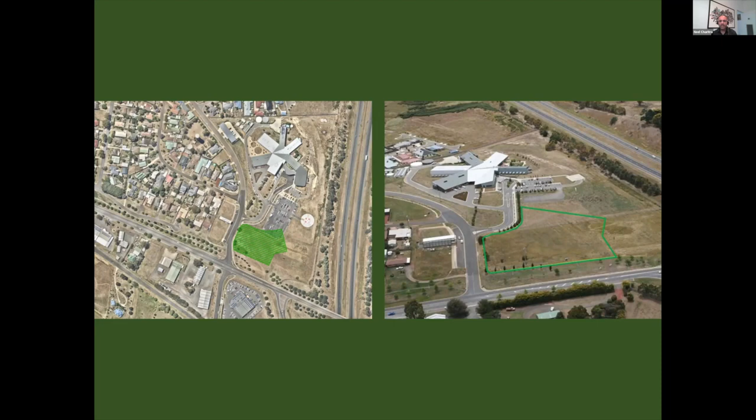The new 1,650 square metre building is designed as the flagship facility for the well-loved and growing health service, and replaces their 30-year-old outdated facility in the centre of town.

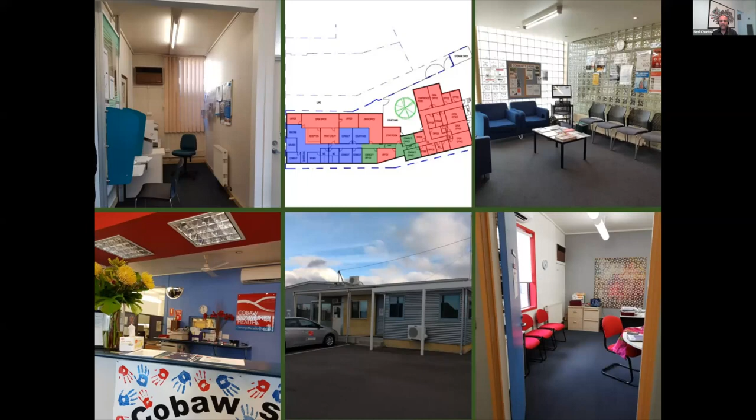They provide important community services such as NDIS, youth mental health, housing support, needle exchange, LGBTIQA support services, podiatry, family counselling, and family violence services, to name a few.

The brief was quite simple: create a non-institutional building that has strong ties to place, creates a new identity, is connected to landscape, has high amenity staff spaces, is calming, has intuitive wayfinding, and is universally accessible.

The brief fed nicely into our interest of embedding the core principles of salutogenic design, or design for wellness, into our projects. These principles are evidence-based and patient-focused, providing spaces that can alleviate stress and anxiety, creating an environment of wellness via clear wayfinding, connections to landscape, daylight-filled spaces, and spaces that are generous and have good acoustics.

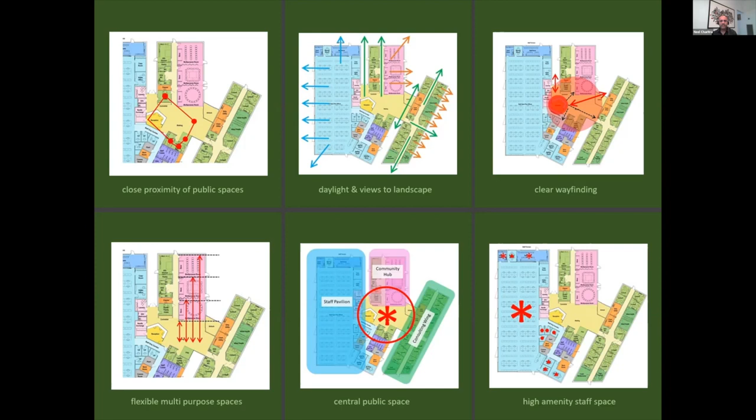The building was positioned outside of the existing helicopter flight path and deliberately aligns its eastern edge to this. The pavilions take cues from the arrangements of farm buildings and also allow for a formal dialogue with the adjacent Kyneton District Hospital.

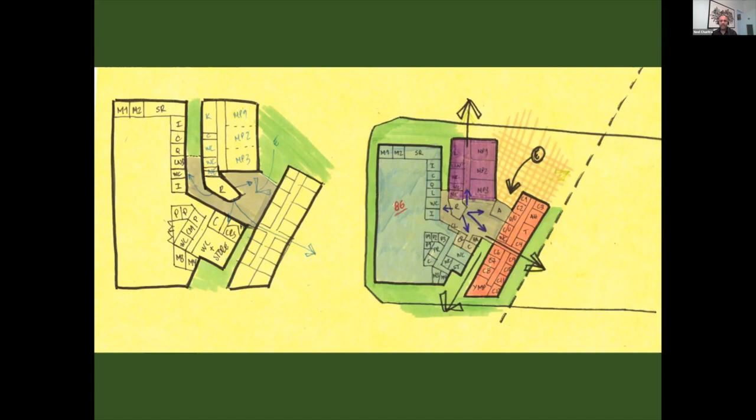The plan is conceived as a collection of pavilions linked together via a welcoming central public space of reception, waiting, and family spaces. Each pavilion is attributed to a particular function: the staff pavilion, the community pavilion, and consulting.

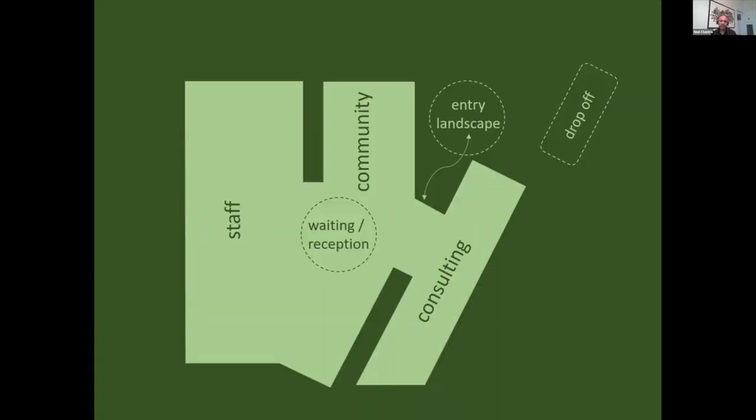To enter the building, you progress around a large central landscape, either via the stairs or a very gentle brick patterned walkway.

Patients are welcomed into a light-filled and quiet central space with sight lines to reception, amenities, waiting, and the flexible community multi-purpose rooms. Having 3 separate buildings allows for a greater extent of windows, and terminating main corridors with windows allows for daylight and views to landscape from all rooms.

Shown in blue is the staff pavilion. Providing high amenity staff spaces was a key part of the brief. The staff are a valued part of the organisation, and it is acknowledged that it is a stressful vocation. The staff pavilion provides a distinctive vaulted ceiling, open plan workplace for 80 staff. The vaults allow for excellent acoustics and access to natural light and views to landscape.

The arrangement of desks also allows for numerous ways to organise the staff and provides them with amenity of indoor plants as dividers. We have provided several smaller quiet rooms for telehealth and a dedicated quiet room for when staff have had a difficult appointment.

The community pavilion, shown in pink at the top, and the adjacent green kitchen, provides large, flexible, multi-purpose rooms that allow for different functions, and a large wheelchair accessible kitchen adjacent that can be booked by community members. It's also planned in a way that it can be used after hours.

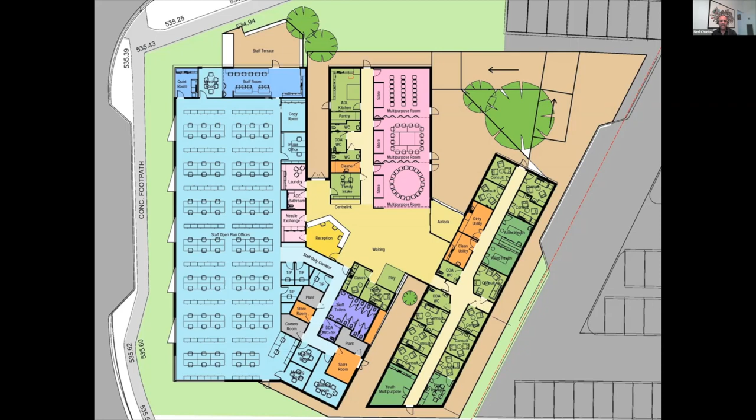The consulting pavilion to the east has the patient at the forefront of the design, with calm spaces, excellent daylight, and connections to landscape. It provides 11 dedicated consulting rooms, 2 allied health spaces, and youth and paediatric multi-purpose spaces.

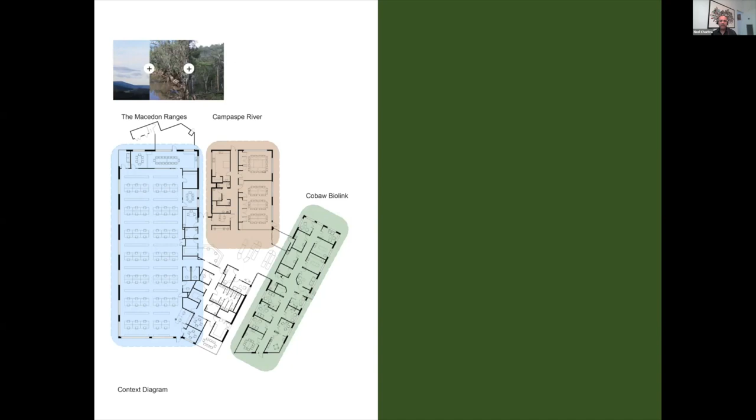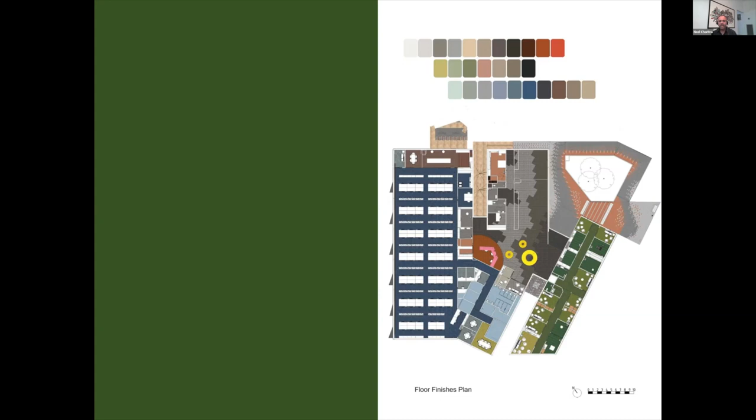The interiors establish a simple strategy for each pavilion, attributing themselves to a specific characteristic of the Macedon Shire: the Macedon Ranges, Campaspe River, and the environmental Cobaw BioLink project. This allows for a colour and material palette to be developed that links the building to its place and provides for a legibility of clear wayfinding.

The dry riverbanks of Campaspe River contribute to the carpet tile pattern, which continues through the brick paving of the external entry landscape.

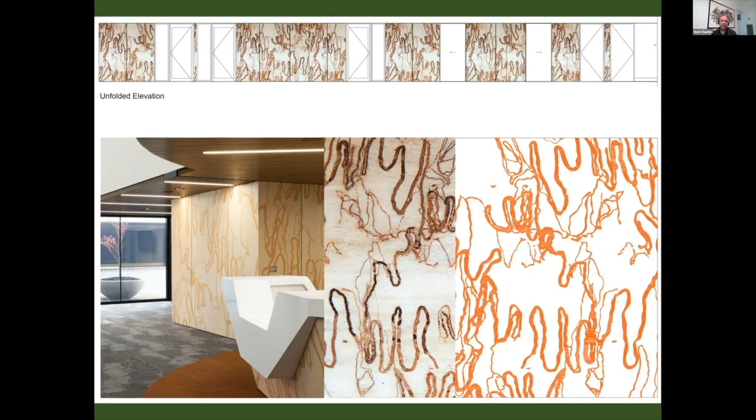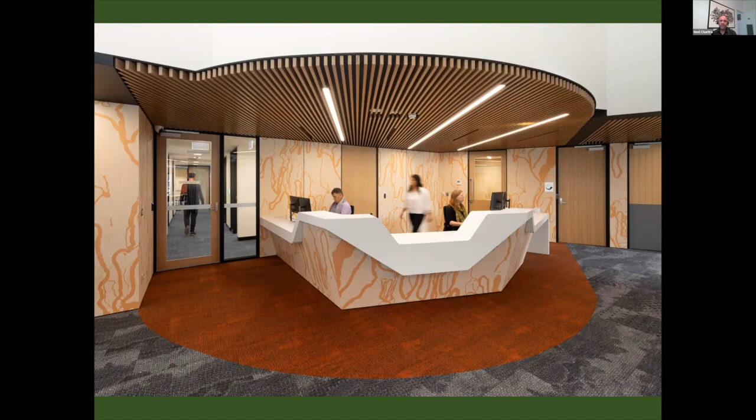Continuing our interest in creating patterns from non-traditional objects, we have lined the walls of the central public space with an overscaled pattern of insect tracks found on local gum trees, which has then been printed on plywood sheets.

The project was conceived in the beautiful autumn colours of the Macedon Ranges, and the brief talks about creating a new identity for the organisation. The distinctive form of the arch takes cues from the local vernacular, including the original 1856 Kyneton Hospital, the Malmesbury Viaduct, and the soft curves of the expansion to Kyneton District Hospital adjacent.

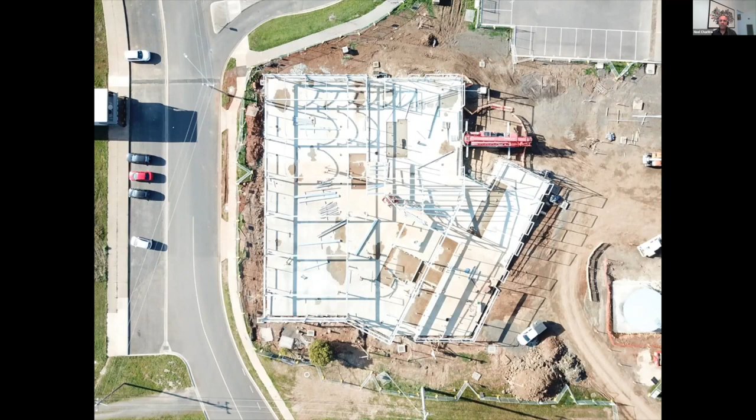The staff pavilion is orientated to Caroline Chisholm Drive and helps not only enhance the new identity, but also helps reduce the visual bulk of the west elevation.

A simple materiality strategy was adopted, with the pavilions being clad in either ubiquitous brick or farm shed colorbond metal. Off-the-shelf sill bricks have been used to create subtle shadowing and texture across the facade.

The horizontal black line allows for a zone of active sun shading to the west, with gold-tinted glazing that deliberately reflects its surroundings. The gold glass references back to the previous life of Kyneton as a service town for prospectors on the way to the goldfields.

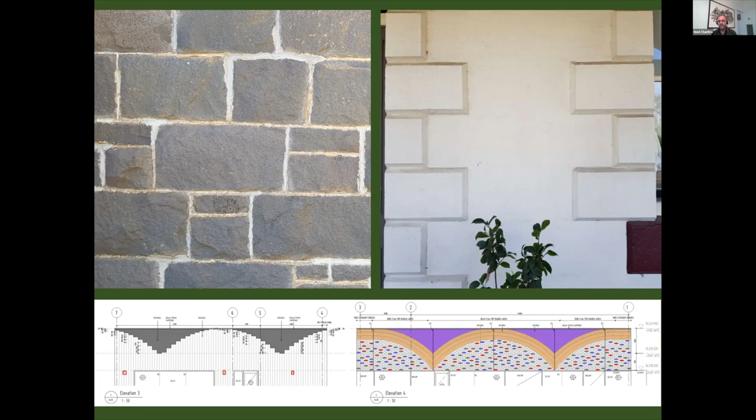The arch form then translates into a metal-clad motif for the consulting and community pavilions. The digitised version of the arch takes cues from the bluestone detailing of numerous local buildings. The 2 distinct versions of the arch establish a new identity for Sunbury and Cobaw Community Health and continue their much needed community service to the Shire.